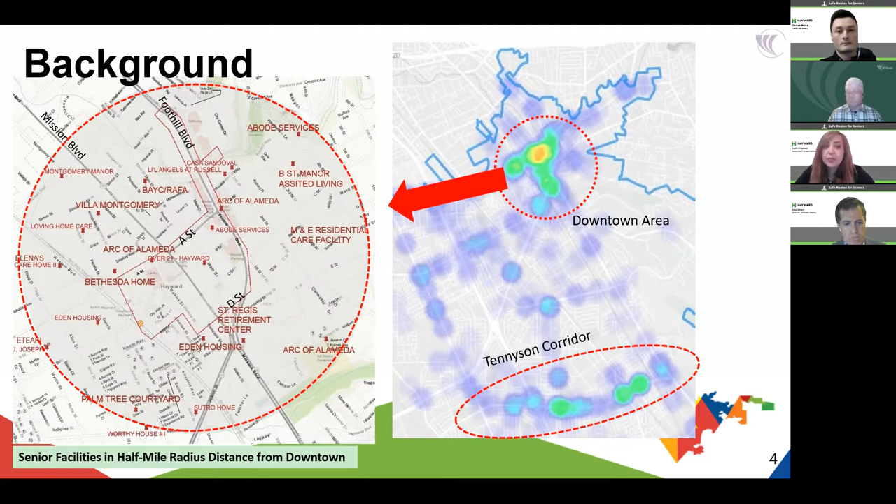The program will impact thousands of seniors who live within a half-mile radius of the downtown area. Many more seniors who visit downtown for entertainment or errand purposes will also benefit from the proposed improvements. Next, please.

City staff, with the help of local senior housing facilities and senior centers, engaged in 2 outreach meetings to gather the viewpoints of seniors on their mobility needs on July 2nd and July 27th of 2019. The purpose of this meeting was to identify obstacles for walking, encourage walking as a transportation option, and develop design solutions to improve walkability and safety for senior residents.

Next, please. The results from the community outreach show the most important obstacles to walking for seniors in downtown Hayward are difficulty crossing intersections, speeding on downtown streets, ADA accessibility ramps, safety issues, and lack of enough pedestrian signals.

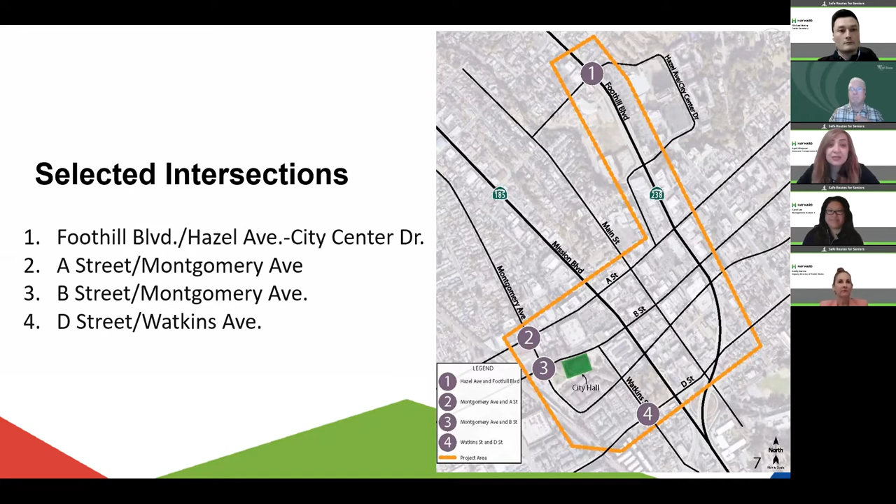Now I want to ask Steve Weinberger from W-Trans, who works with the city, to walk us through the recommended modifications for these 4 selected intersections. Thank you, Aya. My name is Steve Weinberger, I'm a senior principal with W-Trans, and I have with me tonight Barry Bergman and Steve Fitzsimons. Barry and I will be doing the presentation. I'm going to turn it over to Barry, and then I will finish with the renderings of these designs. So Barry, go ahead.

Thanks, Steve. So as Aya was saying, the text in purple is what we're really focusing on here: redesigning intersections in the downtown area with an emphasis on increasing pedestrian safety, specifically focusing on the needs of seniors, with the intent of encouraging people to walk more.

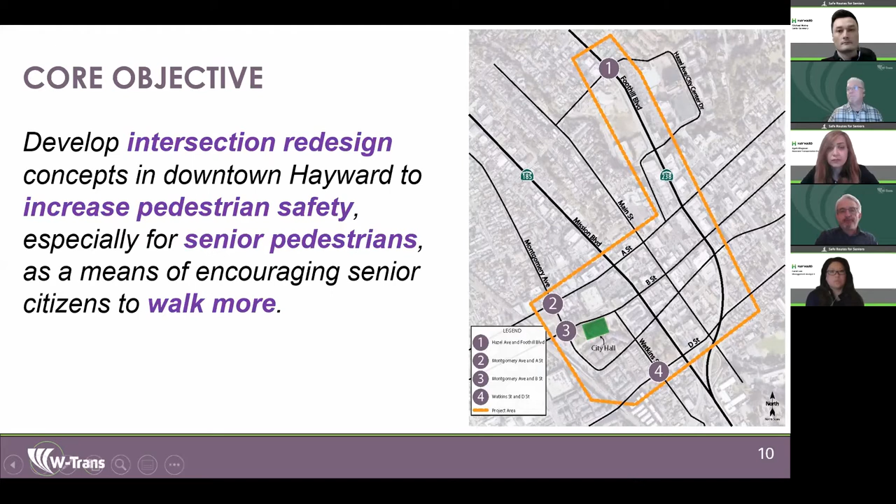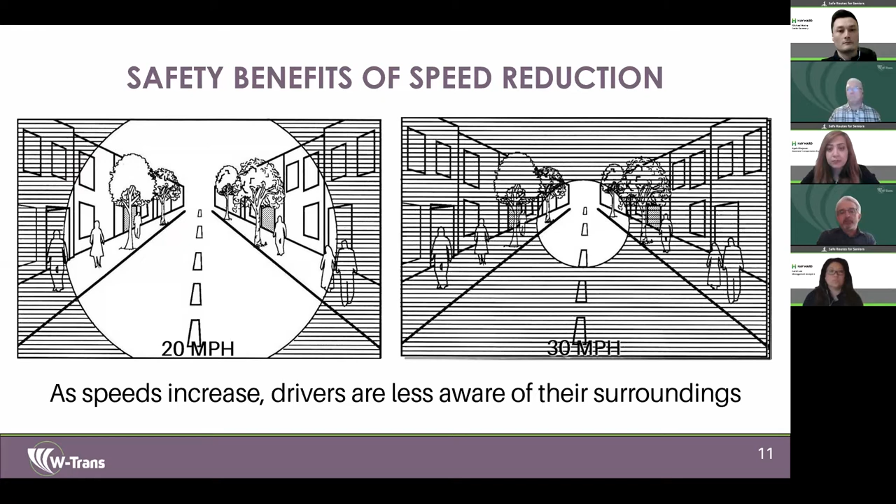One of the things we should keep in mind is that speed is a really important factor in pedestrian safety. As this slide illustrates, it's much more difficult for drivers to keep their attention on things on the side when they're going at faster speeds, so pedestrian safety can be challenging in that situation.

While we are focusing on pedestrian safety, there are potentially some trade-offs at some of these locations, so it's something I'd encourage you to keep in mind. While we're looking at reducing injuries, reducing the severity of injuries, and creating greater comfort for pedestrians overall, there may be some impacts to drivers in that they'll have to reduce their speeds. There may be increased delay at certain intersections, which could lead to increased travel times. So that's some of the choices we have to make.

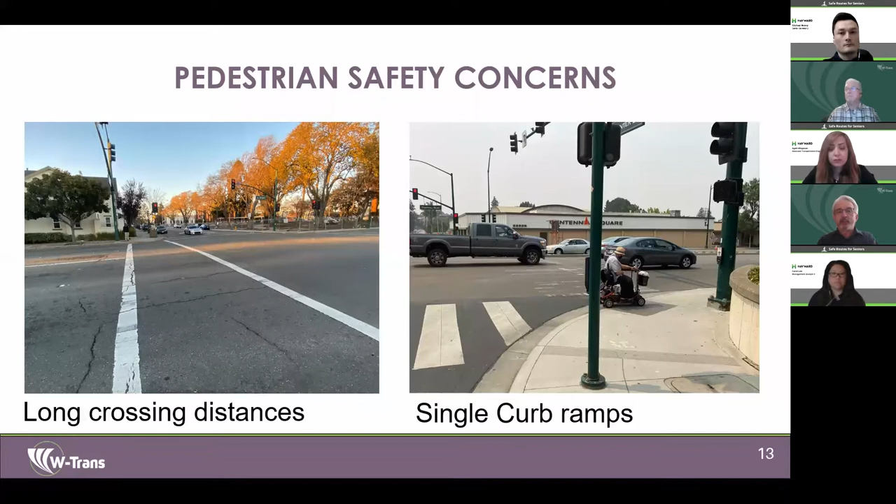Just to illustrate a couple of the issues that Aya touched on earlier, before I walk you through the specific locations we've been focusing on: long crossing distances, and single curb ramps. This is at an intersection where we have crosswalks on both sides, but sometimes pedestrians, if they're using the ramp, have to go out into traffic in order to get access to the crosswalk.

Left turning vehicle conflict - this is a situation where a vehicle will have a green light while the pedestrian has a walk signal. So while vehicles are supposed to yield to pedestrians, there are potential conflicts. Similarly with right turning vehicles, where vehicles have a green and pedestrians have a walk sign, there is the potential for conflict.

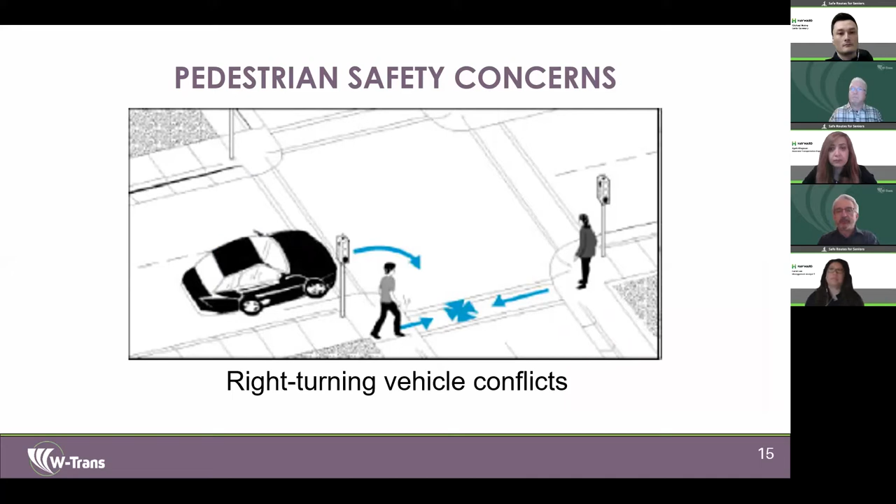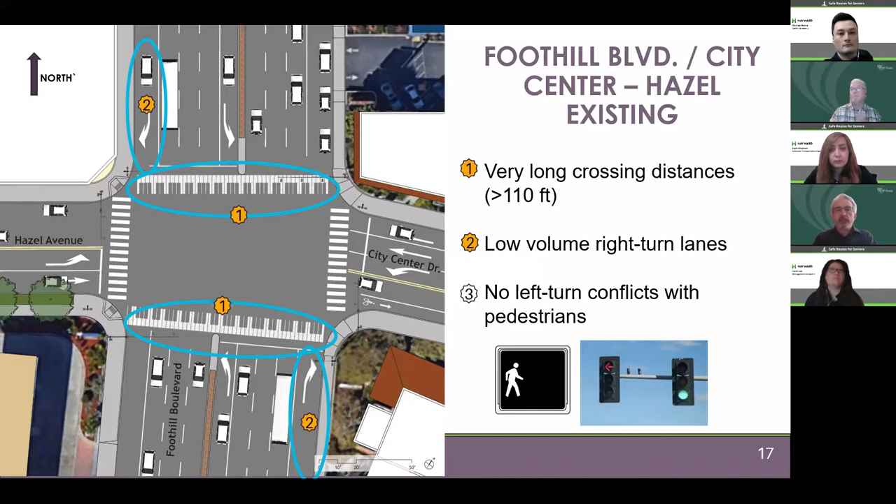Now we're going to take a look at the 4 intersection locations that are part of the study. This is Foothill Boulevard at City Center Drive and Hazel Avenue. The key issues, numbered: number 1, very long crossing distances, you can see. Number 2, we have turn lanes that are pretty lightly utilized, so there's the potential to shorten the crosswalks. Here, there are no left turn conflicts with pedestrians.

Next intersection is Montgomery Avenue and A Street. Here we have a skewed crosswalk at the top of the screen, which makes it harder for pedestrians to see oncoming traffic, and also makes for a longer crossing than if it was just straight across. At this intersection there's very little vehicle delay, and there are left turn conflicts with pedestrians, so when vehicles have a green light, it could be at the same time as when pedestrians have a walk signal.

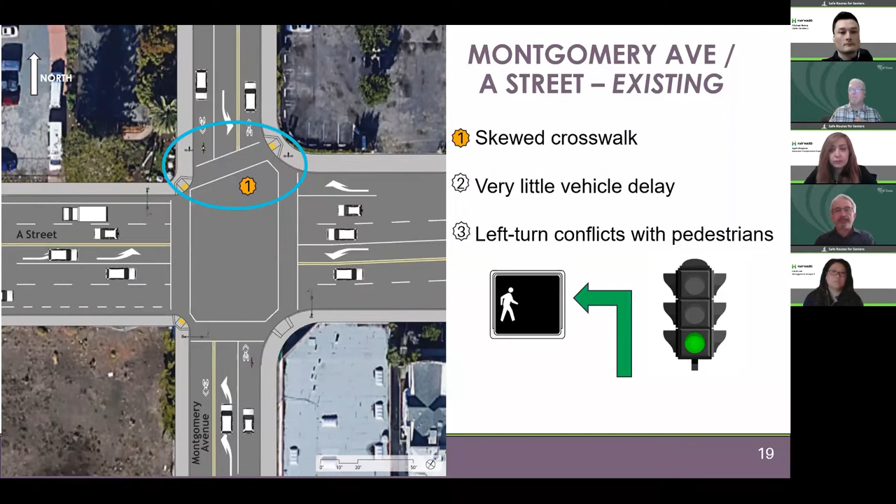At Montgomery Avenue and B Street, here we have 2 skewed crosswalks, so again harder for pedestrians to see oncoming traffic, and it makes for longer crossings. At the bottom of the screen, you can see at the entrance to the BART station where buses pull in, what can be confusing is that the other side of the median is also one way in the same direction, so it's not very intuitive.

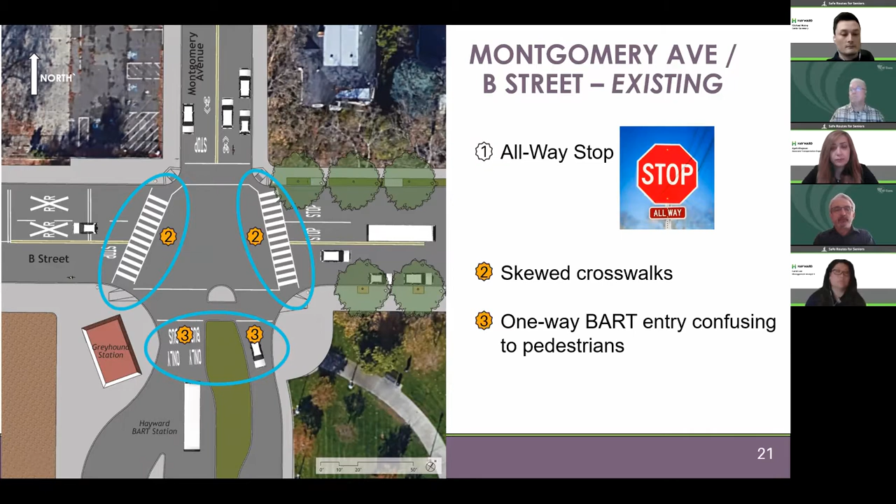At Watkins and D Street, here you can see we have, again, a skewed crossing at the bottom of the screen. If you look at the left side of the screen, there are 2 through lanes and a left turn lane, but as you get to the right side of the screen it becomes 3 lanes, which is kind of an invitation for drivers to speed up. And there are left turn conflicts with pedestrians, where vehicles have the green and pedestrians have the walk signal.

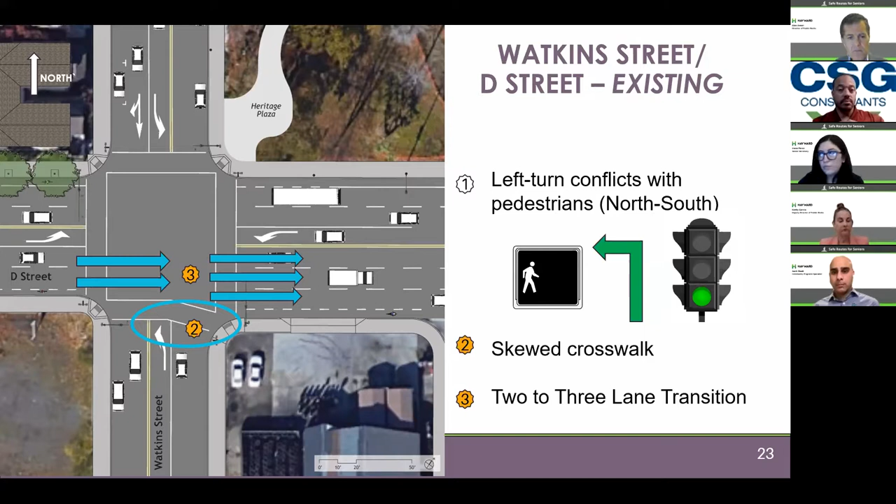So now I'm going to turn it back over to Steve Weinberger, and he's going to walk through some of the details of what is being proposed at this time.

Thanks, Barry. Our recommendations for the intersections fall into several categories: pedestrian accessibility, signal operations and timing, and geometric changes and striping. A number of these things result in changes to the traffic signal equipment, which we'll be discussing.

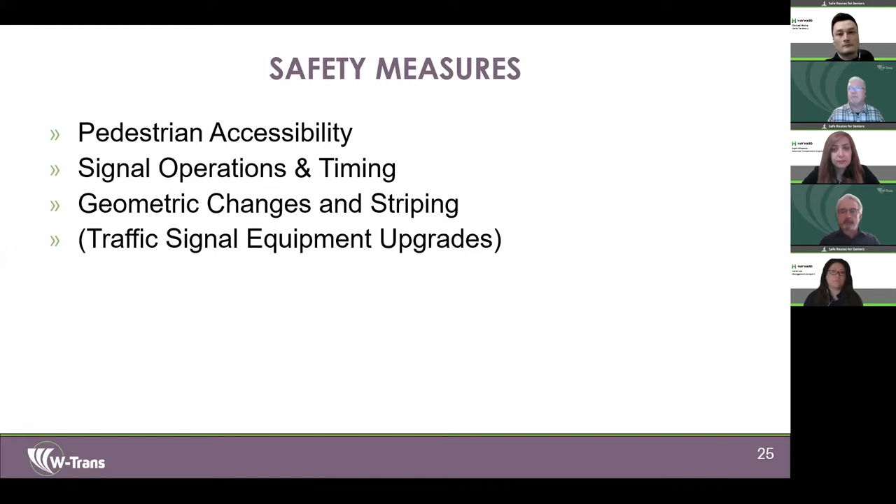First, let me cover pedestrian accessibility. This is C and Watkins, near our study area and the post office. Before, there used to be a single ramp. Barry touched on this. It was improved with the bi-directional ramp, so pedestrians can walk directly into their path of travel crosswalk rather than the middle of the intersection. This is a concept we're applying to every corner at our intersections.

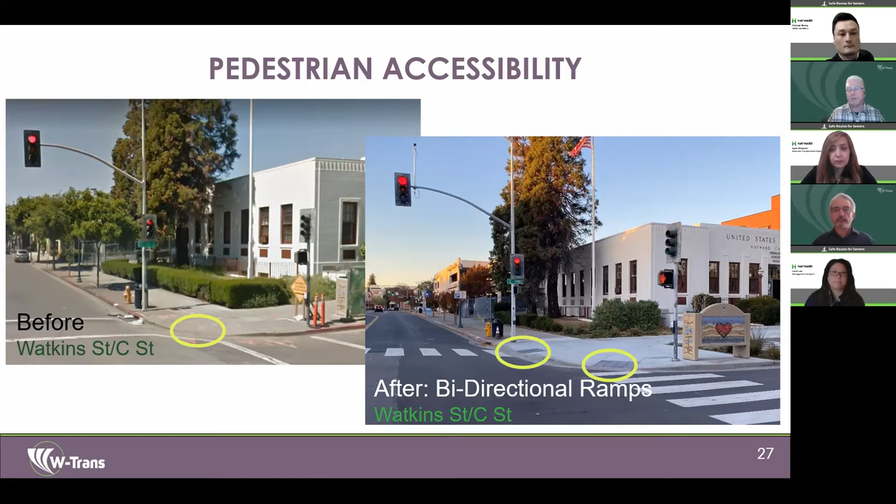Also, as mentioned, we want to separate conflicts of pedestrians with left turning traffic. So any approach that does not have protected left turns, now we'll be adding them.

As well, we'll be proposing to add the message sign that you see for no right turn on red. So when there's a red vehicle signal and pedestrians are crossing, vehicles will get this and be asked not to turn right during the red where pedestrians might be traveling.

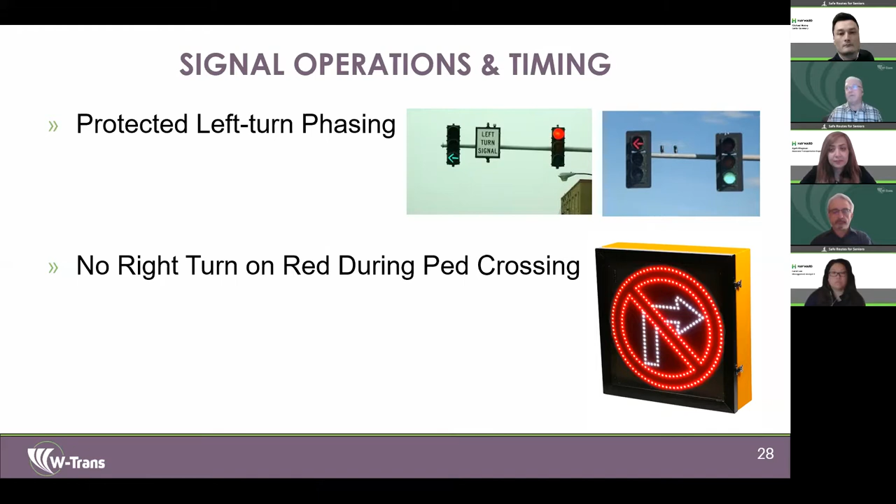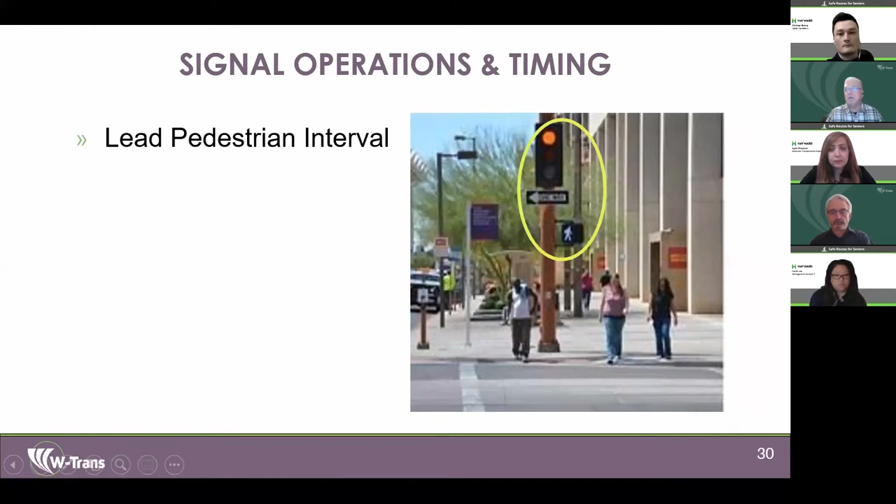Also, we're proposing the addition of a signal phasing called a lead pedestrian interval. If you look up on the signal, basically it's a head start for pedestrians. Pedestrians will get their green walking man signal, and vehicles are still asked to stop red. They will then get their movement. Basically, it gives drivers awareness of pedestrians in the crosswalk - they've already initiated their walk.

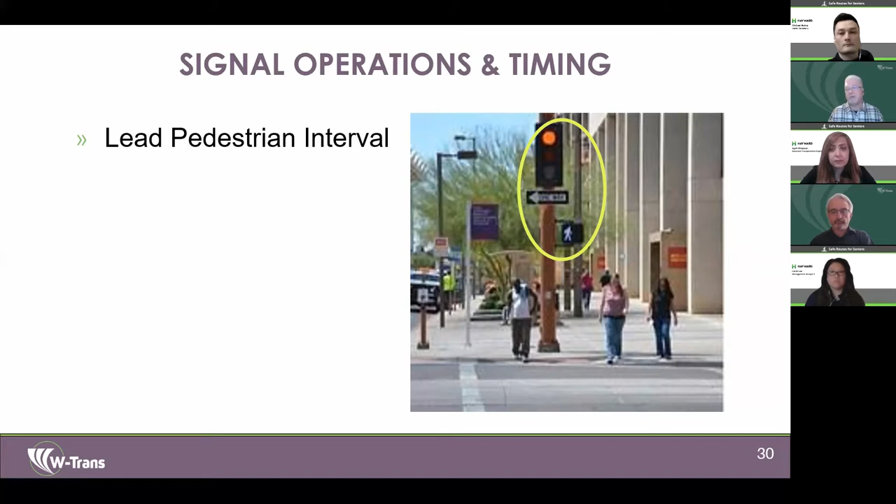And also, in terms of signal timing, we'll be looking at the amount of time given to cross, making sure that there's adequate crossing time, especially for seniors and those with mobility challenges.

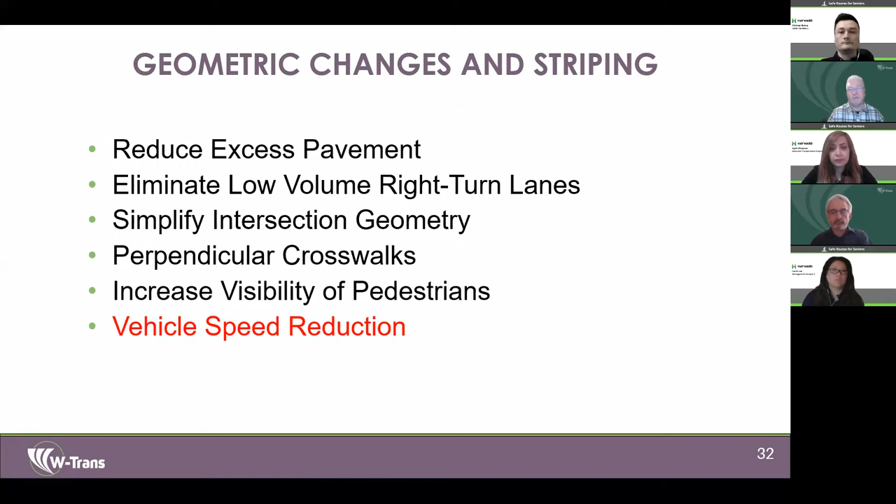In terms of the geometric changes, we'll be addressing a number of items, including skewed intersections, trying to increase the visibility of pedestrians. Barry touched on those low volume right turn lanes, which is an opportunity to shorten crossing distance, and we'll show you how that works. All these changes work towards reducing vehicle speed where pedestrians are concerned and increasing that safety.

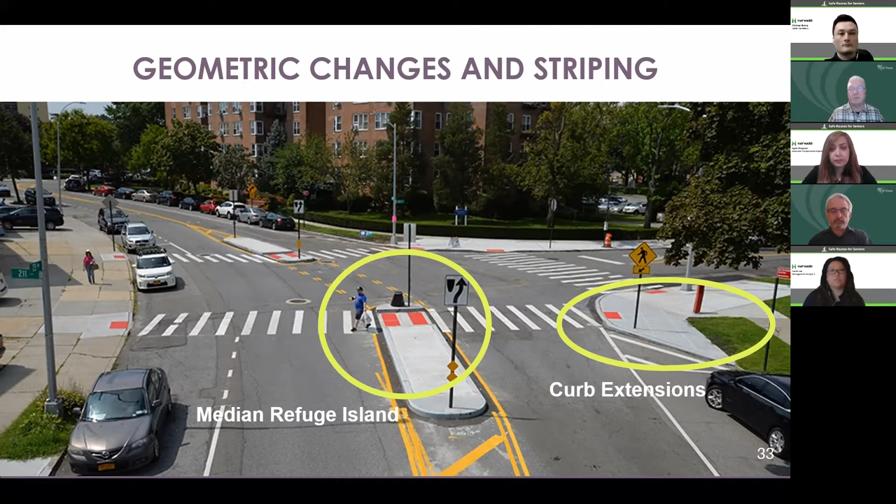Did want to mention at Foothill and Hazel City Center, we'll also be showing you an idea for a median refuge island, shown here, and curb extensions on the side, intended to give pedestrians a refuge as well as to shorten the crossing distance that they're experiencing.

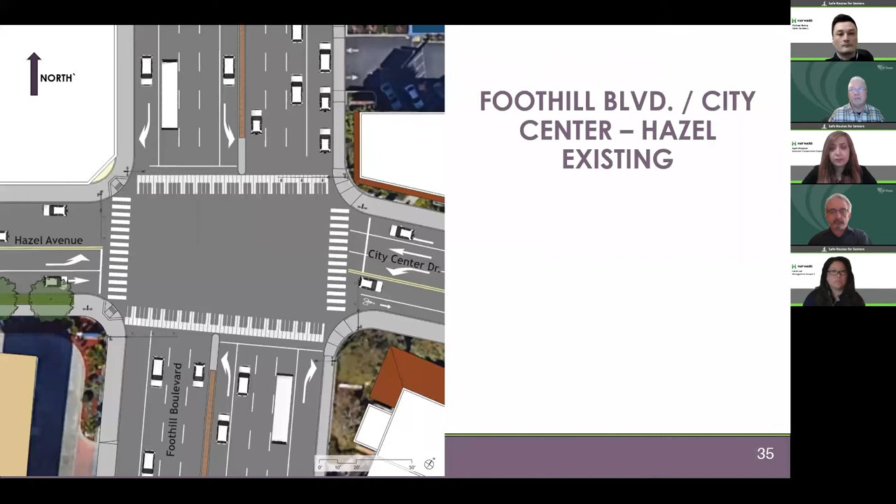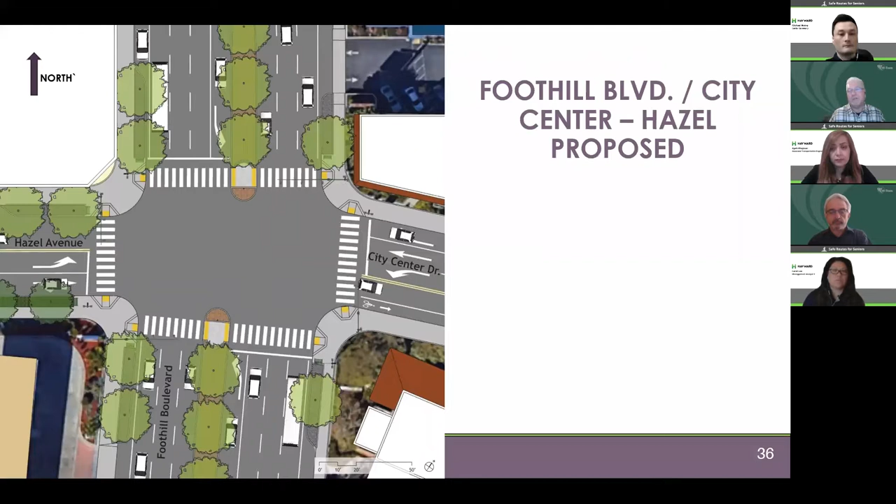All right, let's go through the design renderings of our four intersections. First, we'll cover Foothill, City Center, Hazel. You've seen this image before. This is our proposed design. I think it'll be easier to see these in a 3D fashion, so I'm going to move forward and show you that. First, we'll start you out with a drone view of the actual intersection.

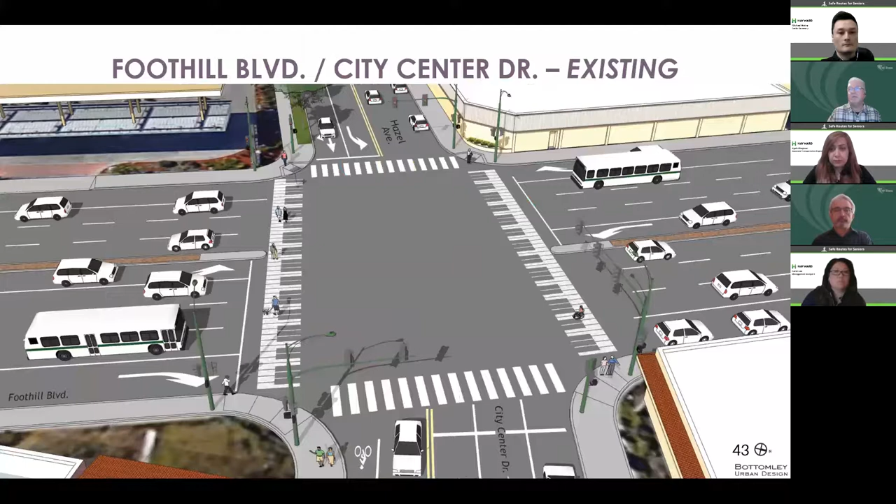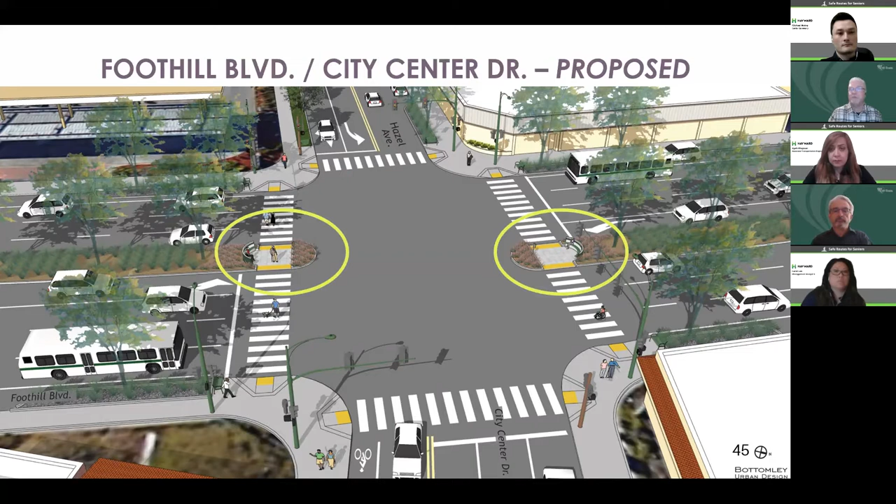Moving on to a view looking west, so we're above City Center looking towards Hazel. And here's the simulation of that view. And here's our design. I'm going to zoom in on our pedestrian refuge where you can get a better view from this angle. Here's a zoom of that.

You'll see that the design includes a seating area for folks that maybe don't want to walk across the entire length of the intersection in the time given. Some seating area, some landscaping. You'll see a pedestrian push button - if somebody wants to get another call to complete their walk, that's there as well. And it's got an entirely flat surface through the intersection, so there's no stepping up or down from curbs walking through this location.

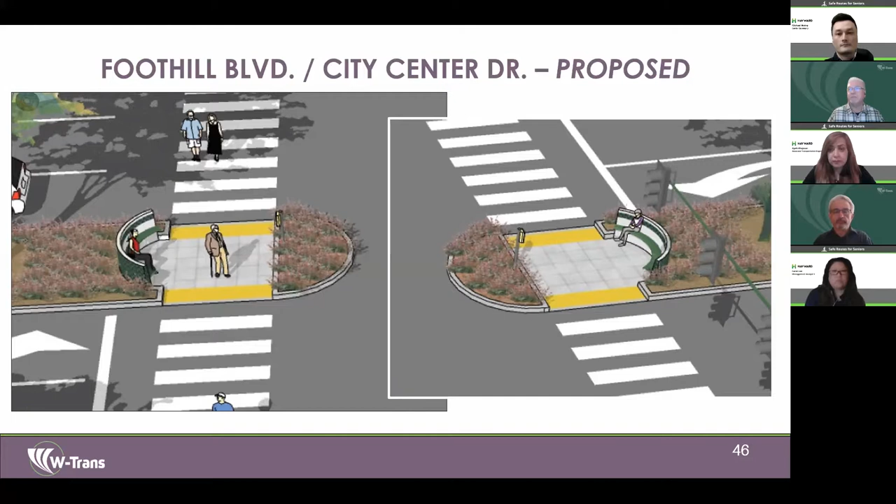And again, as a reminder, these things I already discussed: this intersection, which already has protected left turn phasing, will get no right turn on red indications. We'll give that pedestrian a head start, and we'll make sure there's adequate time for seniors.

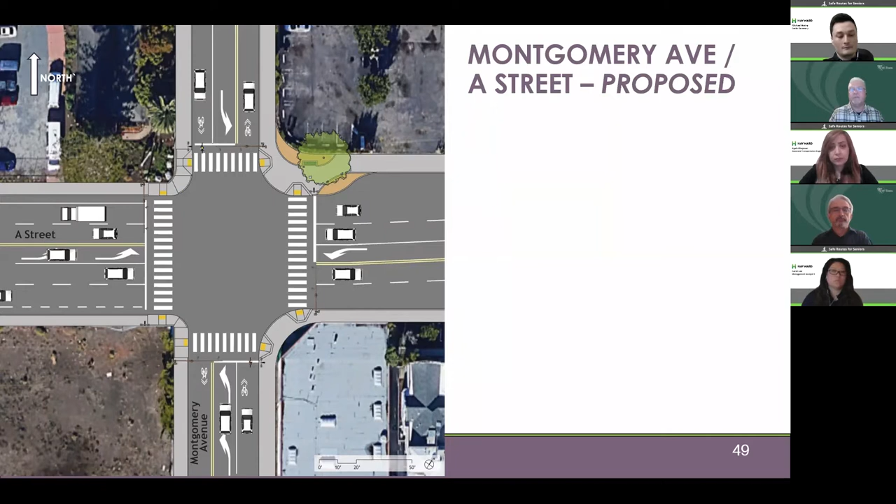All right, let's move on to our second location, Montgomery and A Street. This is our proposed design, but again, we'll look at this in a 3D view for better clarity. Here's a view of the intersection, looking west on A Street, and here's a simulation of that view.

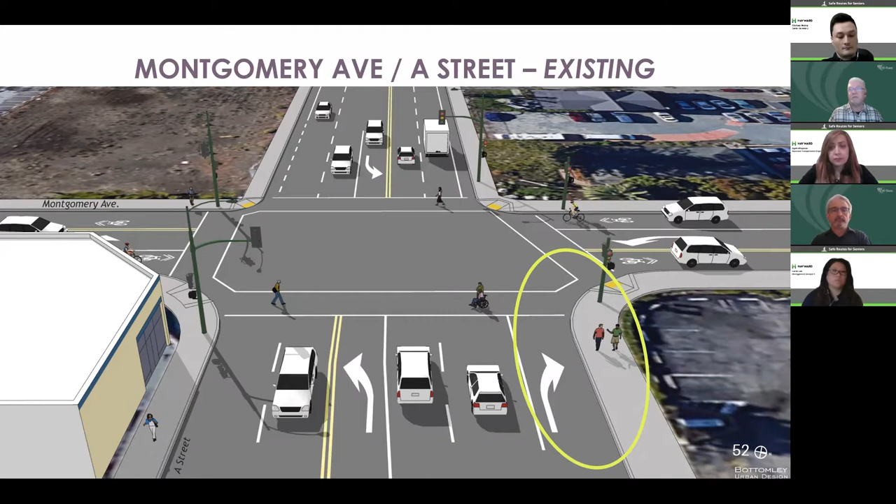Again, focus on this right turn lane. This is a lightly used right turn lane, and it also creates that wider crossing and that skewed intersection. So let's move on to the proposed design.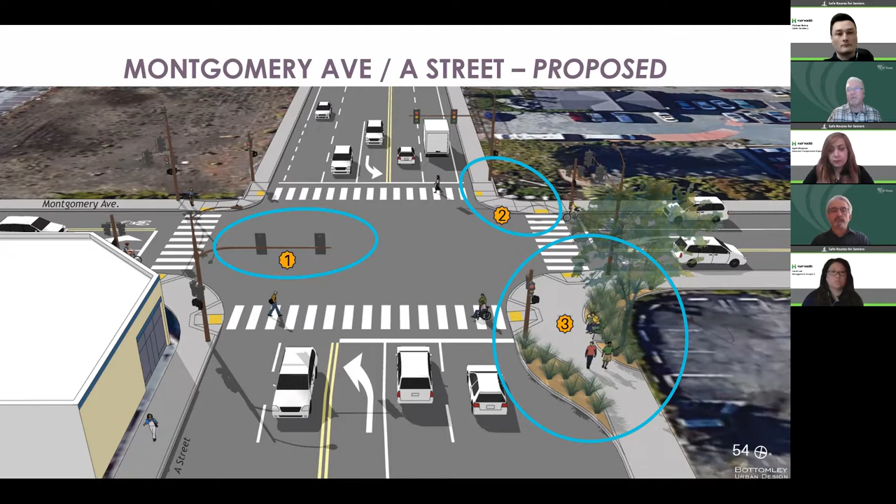And again, this intersection will get all these same features we discussed before.

All right, let's move on to Montgomery and B Street near the BART station. Here's our existing view and our proposed design. Like the others, we'll move on to the 3D view.

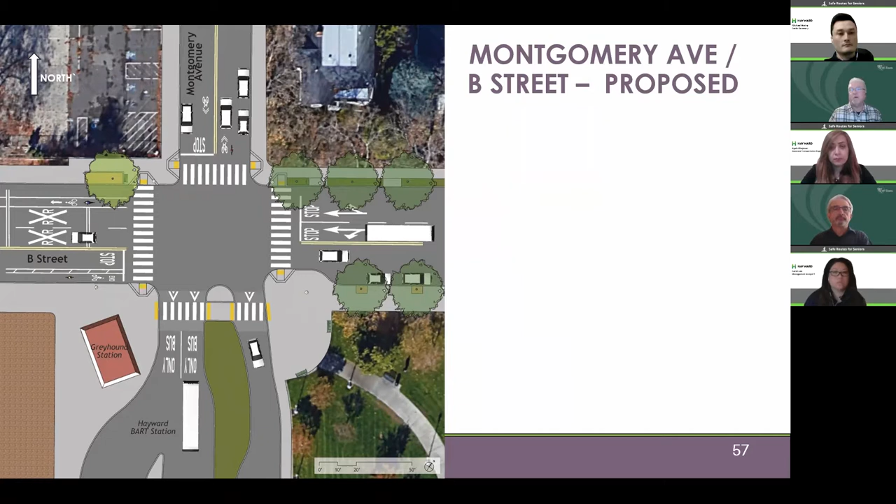Here's a bird's eye view looking towards the BART station. You'll see the AC Transit buses at the top of the screen. Here's a simulation of that view. And again, as Barry mentioned, the one-ways on both sides of the median in this area.

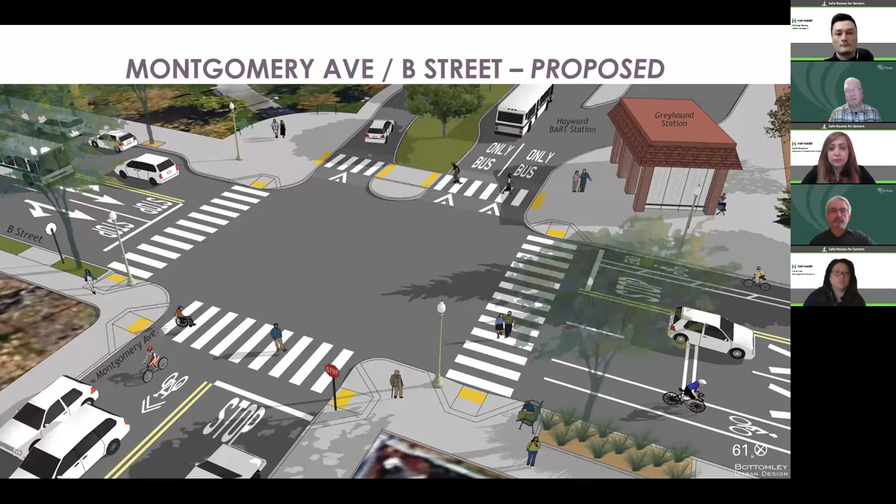So again, focus on this approach as I move to the proposed design. You'll see that it still would remain one-way on both sides because AC Transit buses are only allowed on the right, passenger cars on the left, but we've provided a raised crossing at this location.

Let's go through the other changes. Number one, the intersection will remain an all-way stop-controlled intersection, which has some advantages for pedestrians. We're providing some arrow markings there just so people are aware of where vehicles are turning.

Number two is our raised crossing, which I discussed, which gives the queue, and also slows traffic down as they cross into the BART station. You'll see on both sides we have dual ramps, and we've extended those curbs out to shorten that crossing distance. We've also made sure that all the buses will still have adequate turning radius to turn into the BART station.

Number three, you'll see we've straightened out the skewed crosswalks on both sides of the intersection. Number four, on the lower right, we've extended the bike lane, which now terminates one block west. We've brought it up to the Montgomery intersection as requested by BART.

And number five, I just wanted to point out there is a Greyhound bus stop location. That's still there, just about 100 feet out of view towards the west.

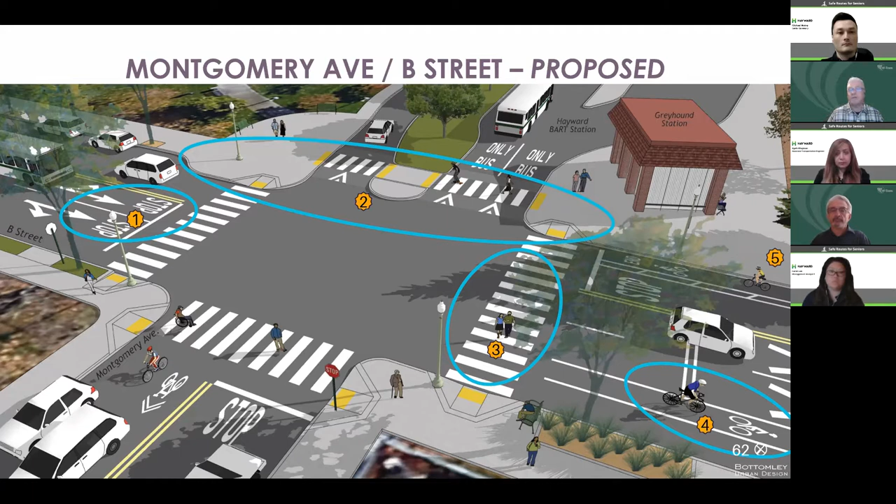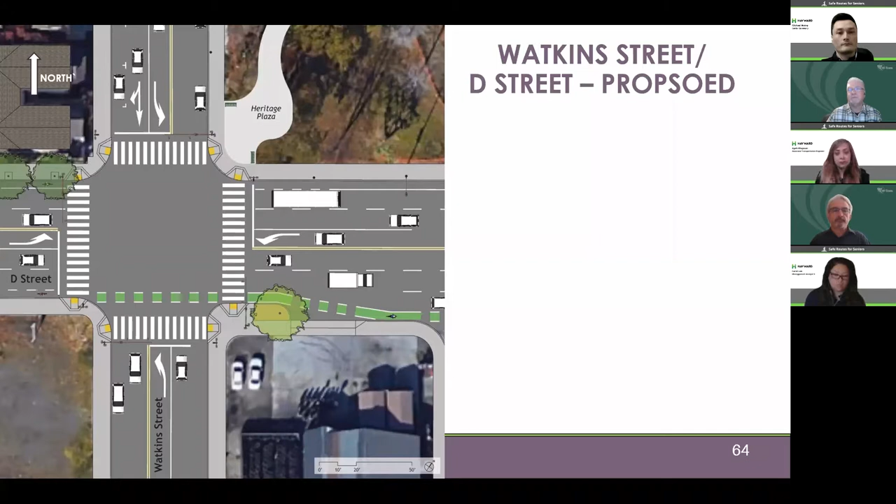Let's move on to our last intersection, D and Watkins Street. Here's the proposed design. Here's our bird's eye view, and you see in the top center of the screen is Heritage Plaza Park. Let's go to our simulation.

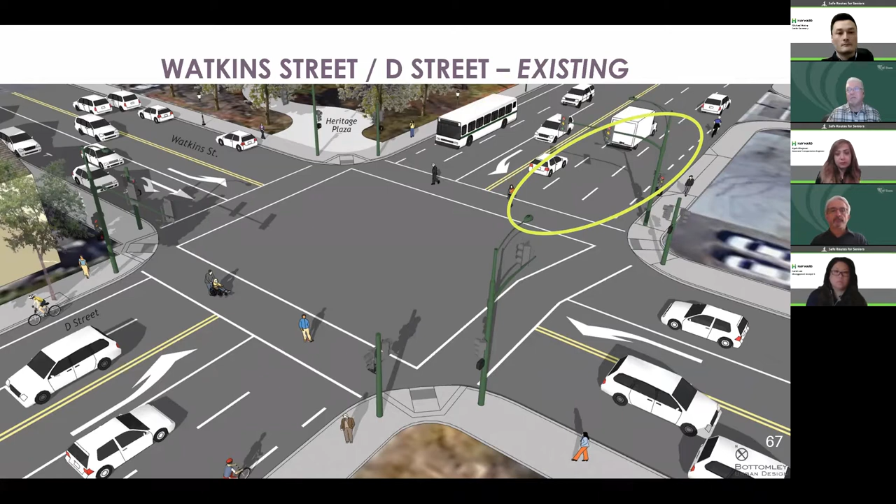And as we move to the proposed design, keep an eye on this area. Barry mentioned this—it's where two lanes go now into three lanes through the intersection. So let's move to our proposed design, and I'll talk about these areas.

So you'll see the dual ramps—that's actually added at all four corners. We've also added some seating near the entry to the Heritage Park Plaza.

Number two, that's our area that was three lanes. It's now two lanes immediately through the intersection, but then opens to three as you get past the intersection. You'll see the third lane in the upper right. We've also given bicyclists some markings to help clarify those lanes through the intersection.

Number three, again, dual ramps.

And we've pushed that curb out towards D Street to make that crossing shorter across D Street.

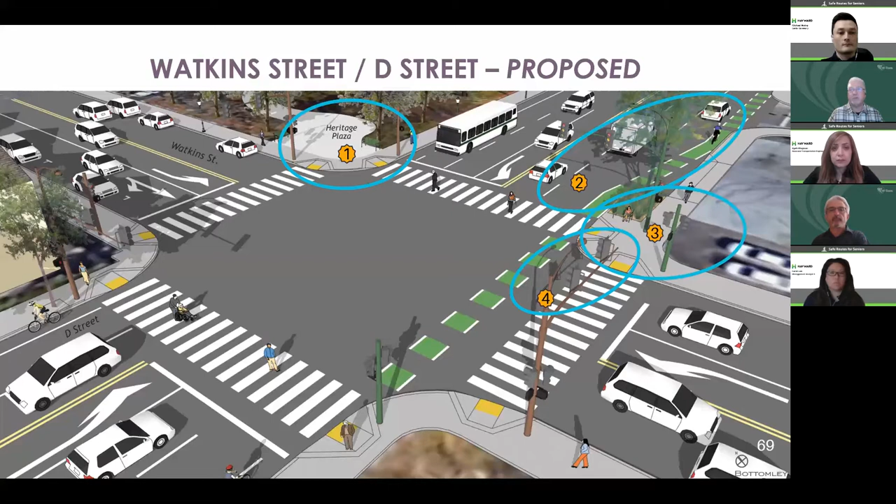Number 4, I'm circling the signal equipment. Again, this location in the north-south direction, we don't have protected lefts that potentially conflict with pedestrians. So we're adding the signal equipment for protected left turns, along with the same signal improvements discussed at the other signalized locations that will be advantageous for pedestrians. So that completes the review of the designs.

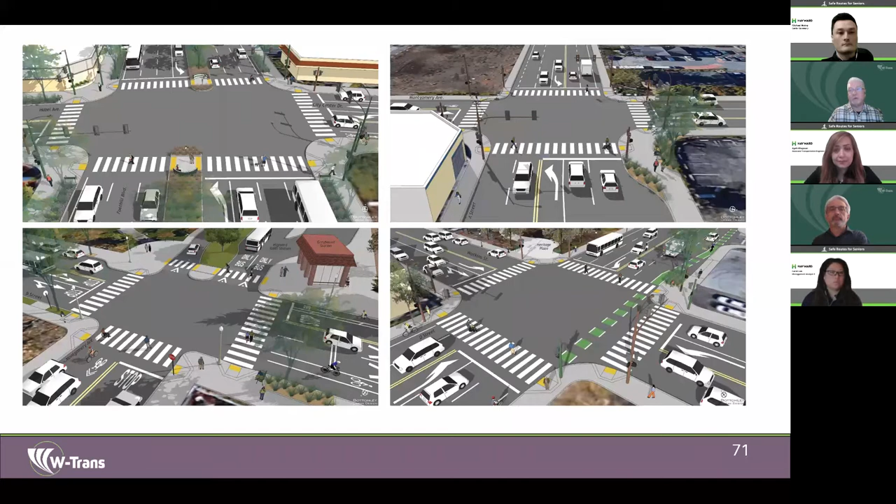Barry? You're on. There we go. Sorry.